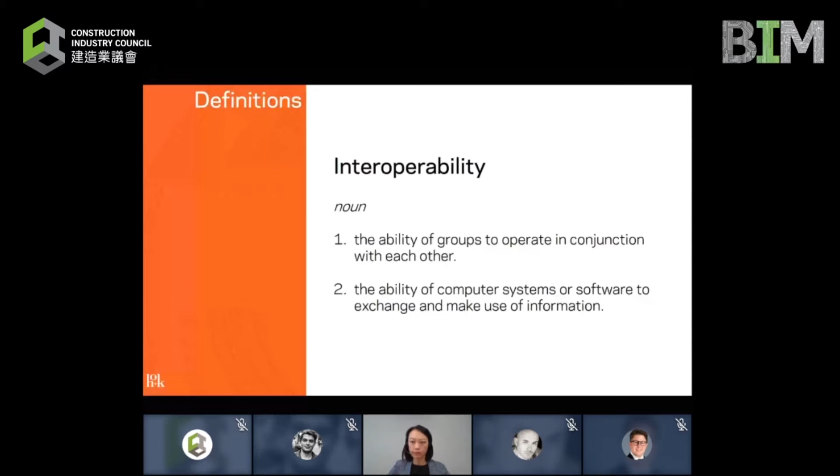If we look up the definition of interoperability, we find it has two layers of meaning. The first is the ability of groups to operate in conjunction with each other. The second is the ability of computer systems or software to exchange and make use of information. This term has three folds: people, computer systems, and software.

So how do these three connect in the BIM workflow? Let's zoom in and take a look at a typical size BIM team in one of our HOK projects. The first definition of interoperability, the ability of groups to operate in conjunction with each other, applies to the BIM team that includes owner, general contractor, architects, engineers, and subcontractors. Each role has their own responsibilities. It is the ability of these groups to use the tools which enable them to communicate and coordinate in conjunction within the BIM team and bring the projects into reality.

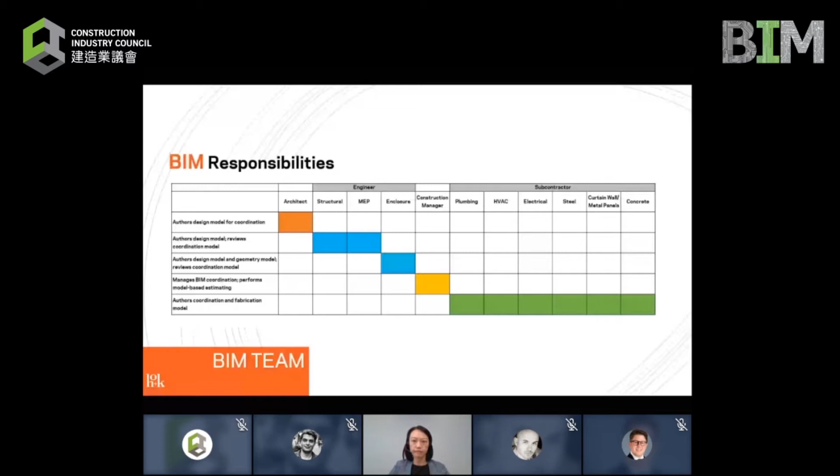Obviously, communication is required for all of the collaboration needs. The more dispersed teams are, the more important efficient communication becomes. Work sharing enables teams to understand design changes no matter where they are. Therefore, bandwidth or latency of the internet connection needs to be included in the considerations when setting up the team.

We also learned how to select hardware for 3D and BIM workstations running different software, realizing that one hardware specification does not fit all users' needs. Our information technology team had to reevaluate our BIM users' specific computing requirements based on software usage.

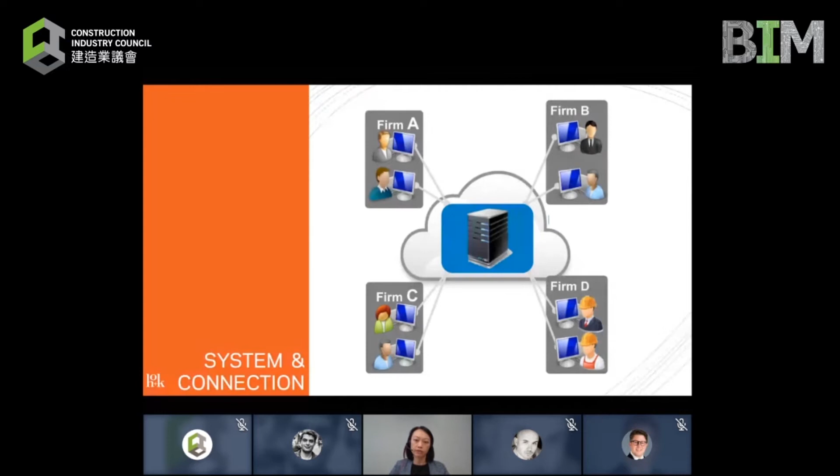With the recent rise of software as a service, SaaS, software applications will become more commonly hosted over the internet via a subscription model. Our internet dependence will only become a greater requirement in order for BIM teams to work smoothly.

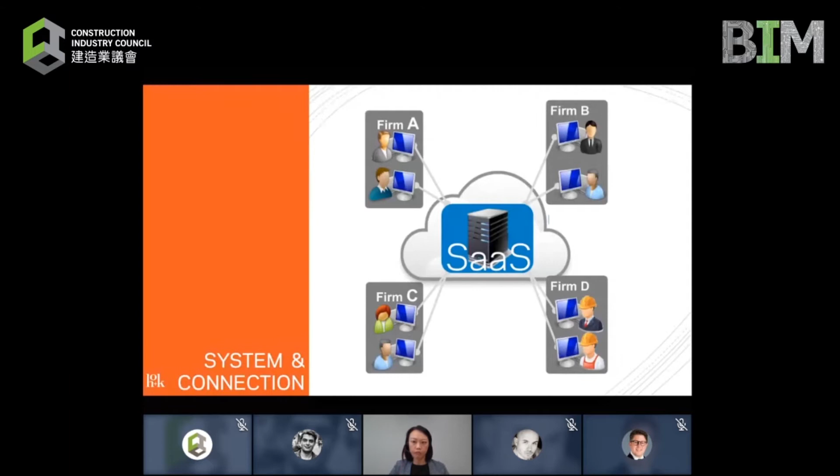When the design and construction team utilize different tools during their design process, being able to connect the primary software among different disciplines makes interoperability workflows even more essential.

If we talk about the second definition of interoperability, we need to zoom out to a big picture that consists of software, computational design plugins, applications, and cloud computing platforms that are so intertwined you will need a very large map in order to navigate through this maze of information exchange ecosystem. Learning how to connect one tool to another and make use of the information is not always easy. It requires innovation, creativity, and most importantly, a multidisciplinary mindset.

The BIM use of connecting the information exchange ecosystems involves both width and depth. The quality of everything being connected aligns with Leonardo da Vinci's philosophy of interconnectedness back in the 16th century. He saw science, engineering, and arts as complementary rather than distinct disciplines, and thought that ideas and formulations in one realm would inform the other.

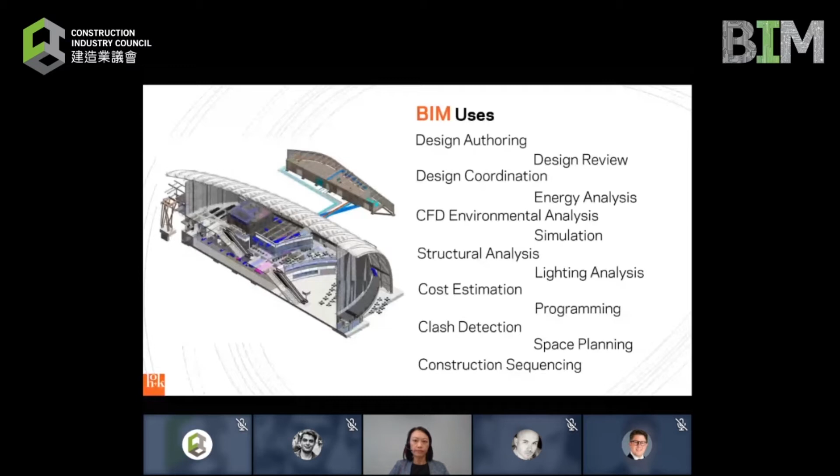The project and team I've been referring to is the Anaheim Regional Transportation Intermodal Center, also known as ARTIC. Located in the home of Disneyland, Southern California in the US, the city wanted an iconic structure for its new transit hub to celebrate mobility and fantasy, inspired by great transit halls of the past, as well as the historic hangars found throughout Southern California. ARTIC takes its form from a rotated catenary arch.

Designed by the Los Angeles office of HOK, the 6,200 square meter building opened in 2014 with an ethylene tetrafluoroethylene (ETFE) cladding around a steel shell. The exuberant design is a class by itself. ARTIC now serves passengers of the region's Amtrak and Metrolink trains, as well as local and regional bus lines. It will also accommodate future high-speed rail through California.

The complexity and scale of the design and execution required very diverse skill sets. Achieving the project goals within budget was one of the many challenges that became an achievement of a large group of designers and technical experts.

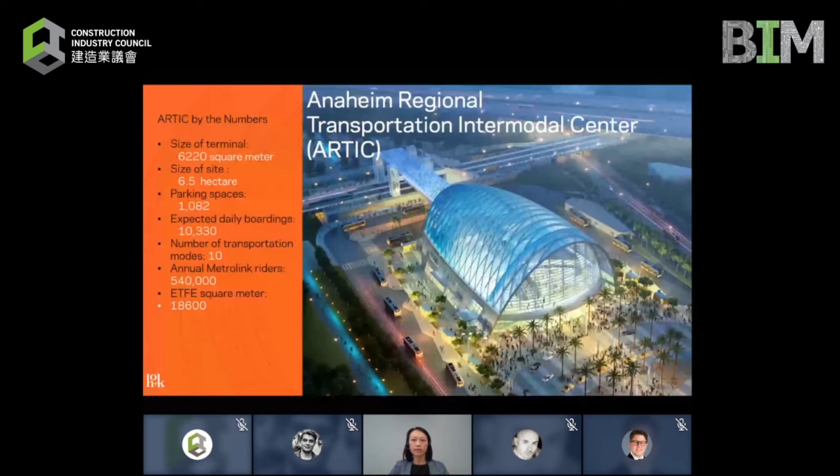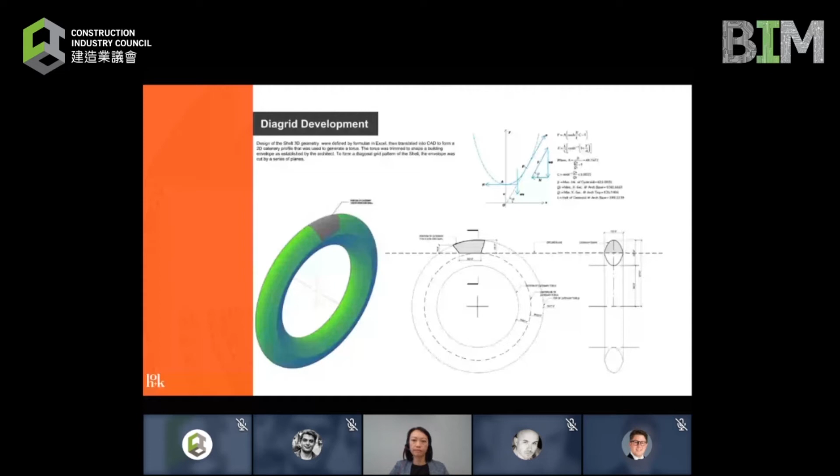For architects, the use of BIM was crucial in clearly communicating this iconic design to the clients and the public, and in assisting the project team in developing the complex form, geometry, and functions into reality. BIM also delivered coordinated documents in a compressed timeline, maintaining design intent well into construction. The greatest benefit of BIM utilization on the ARTIC project is the coordination efficiency achieved during design and construction.

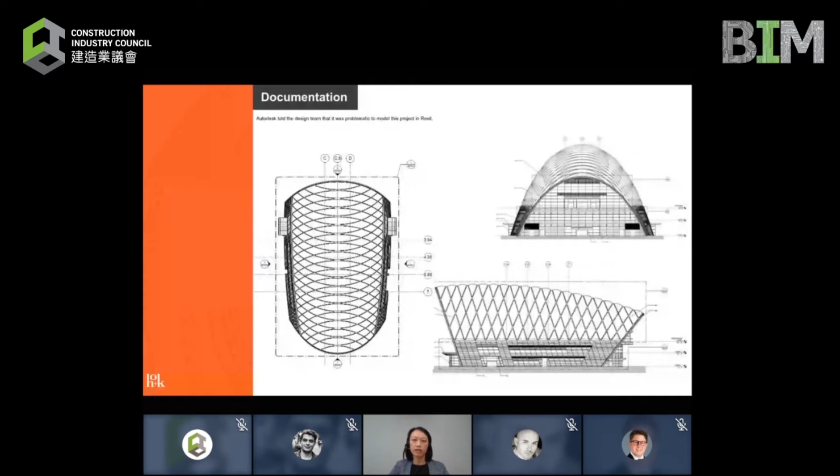The design team utilized Revit, Rhino, and CATIA as the primary software, along with Navisworks for pre-construction clash detection. The structural engineer and the enclosure consultants used proprietary tools to generate geometry in multiple formats suitable for their purpose and information exchange. Multiple analytical tools were used to study the various components and element types. Entire structure systems were modeled to ensure holistic fidelity with integrated systems.

In the general contractor's statements, the BIM model was credited as being very significant not only to them but also to subcontractors as well. The iconic design had requirements that could not be built without the BIM analysis and models. Due to the complexity of the project, utilizing geogrid dimensions, it could have been impossible to coordinate location without BIM.

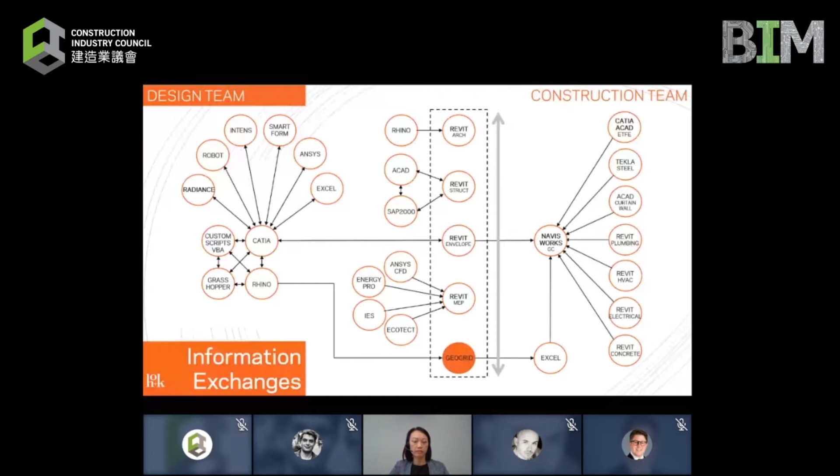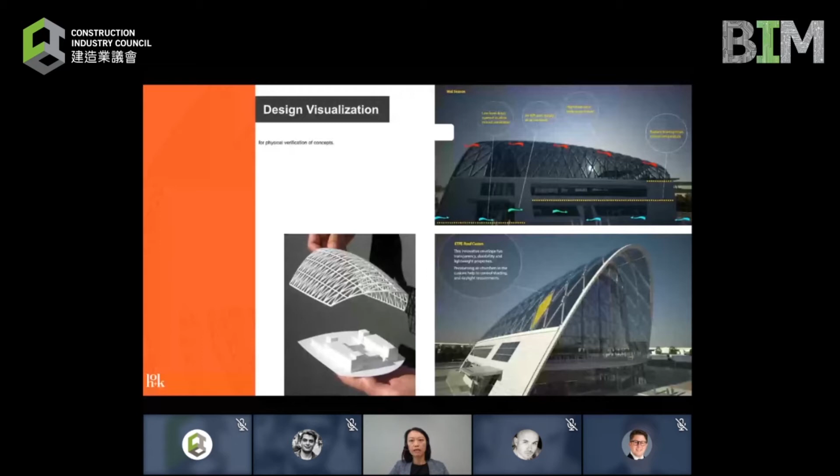By using BIM, the project team was able to produce 3D printed study models, but was also able to analyze the pedestrians and vehicular traffic to ensure safe path of travel. Analytical BIM models were employed for performance simulations of wind, ventilation, comfort, energy, temperature, daylighting, and shade. The analysis was also useful to confirm the sustainable strategies to achieve LEED Platinum certification.

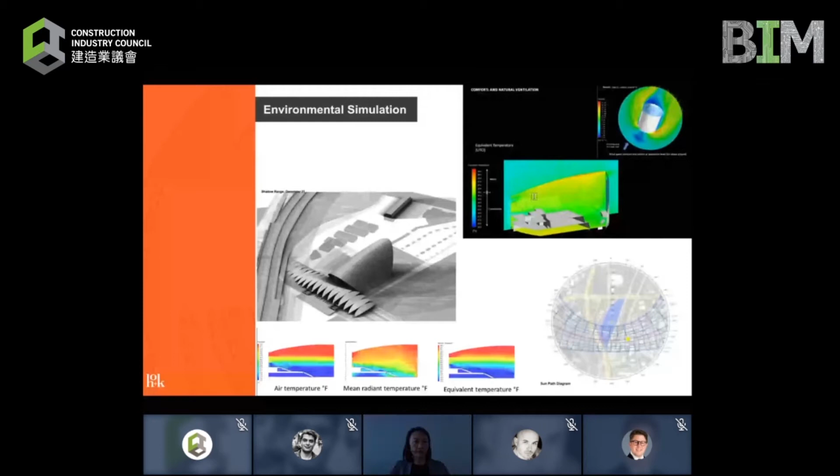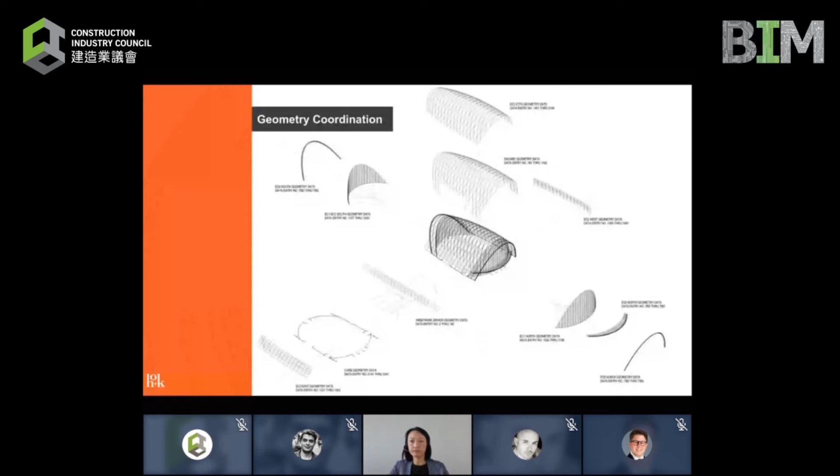For design control and interoperability, all components associated with the complex shell form were coded into what has become known as the geogrid by the build team. The 3D design was reduced to the simplest geometric elements, points and arcs, to convey the exact design dimensions to all stakeholders while remaining software agnostic. The approach was carried through to confirm as-built survey.

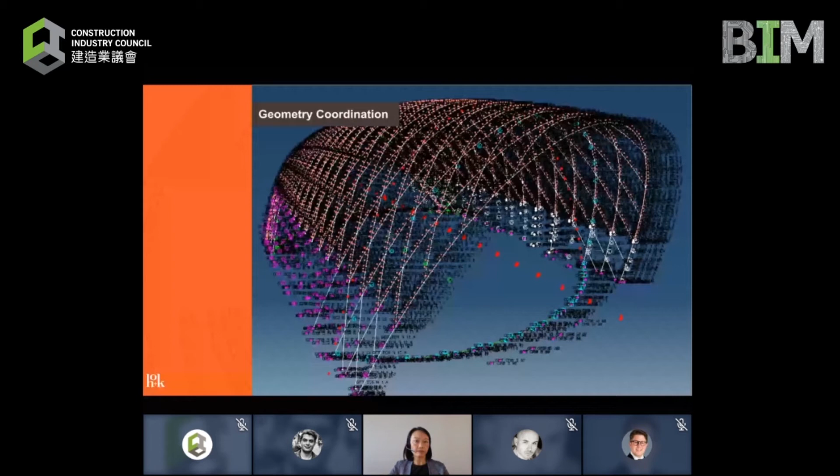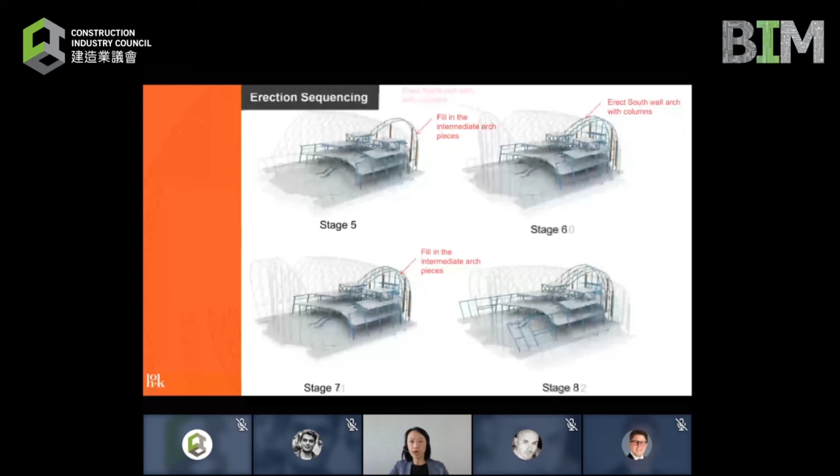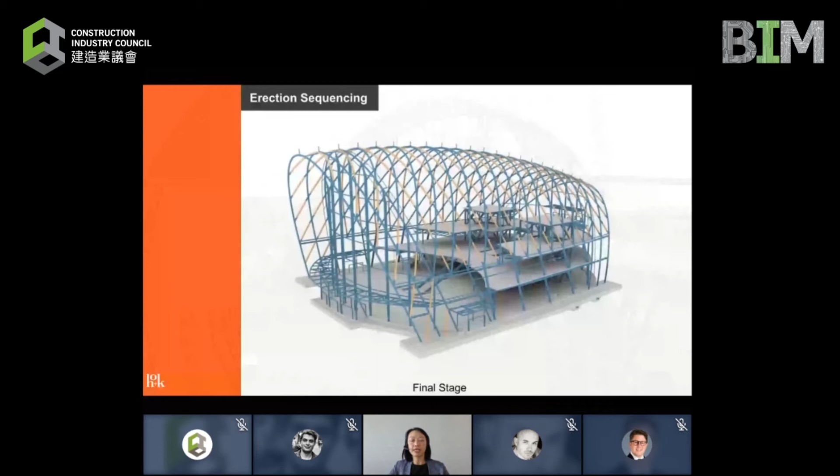The fabrication of the structural steel was designed with complex compound curves. The only means to fabricate this material is by the use of a model. Once fabricated, the only means to erect within tolerance was by using the geo points. As the general contractor stated, the as-built model is the only way to accomplish this.

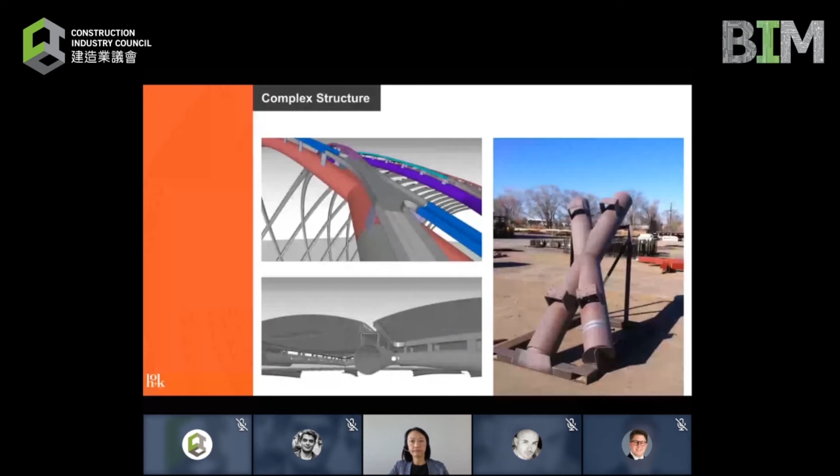Computer numeric control fabrication technology, CNC, was used for the three-way curved curtain wall at the north and south entrances. Because of the geometric data, defined points for the face of the glass, determining the armature connections and column location requires precise control of the positioning. Using BIM eases the production of complex three-dimensional shapes that are almost impossible to duplicate with manual machining.

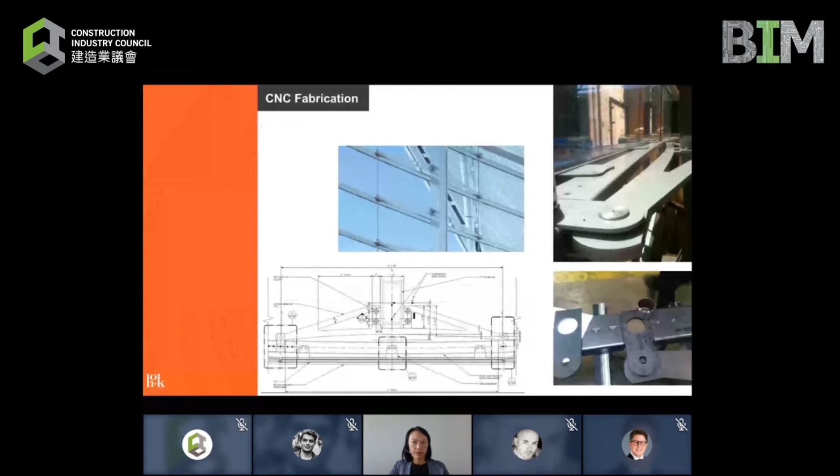The integration of the facade structure and the arch structure were formed early in the competition phase. The ETFE pillows take complex forms to match the curves of the arches, forming the envelope. Each pillow is sized differently, consisting of 3 layers of ETFE. Although it's not the first project to use an ETFE cladding system in Southern California, the sleek, comfortable quality of the Great Hall interior has become a tourist attraction.

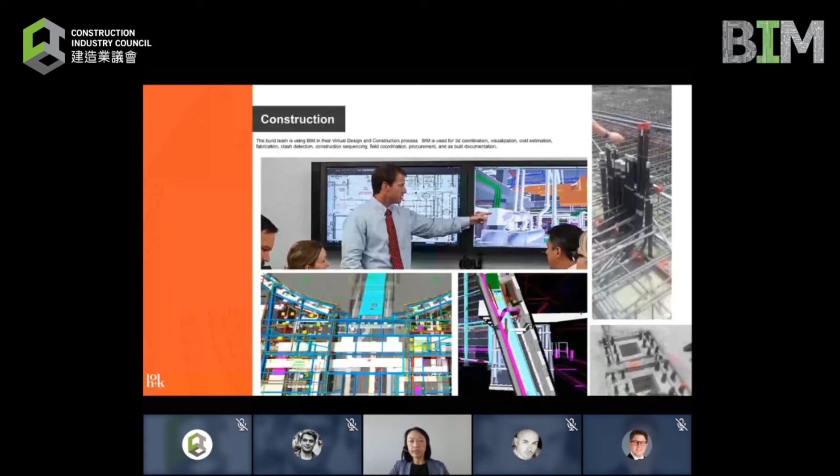The build team used BIM in their Virtual Design and Construction process. BIM is used not only for 3D coordination, fabrication, clash detection, construction sequencing, but also for as-built documentation.

Let's watch a video about the fabrication and construction process of ARTIC.

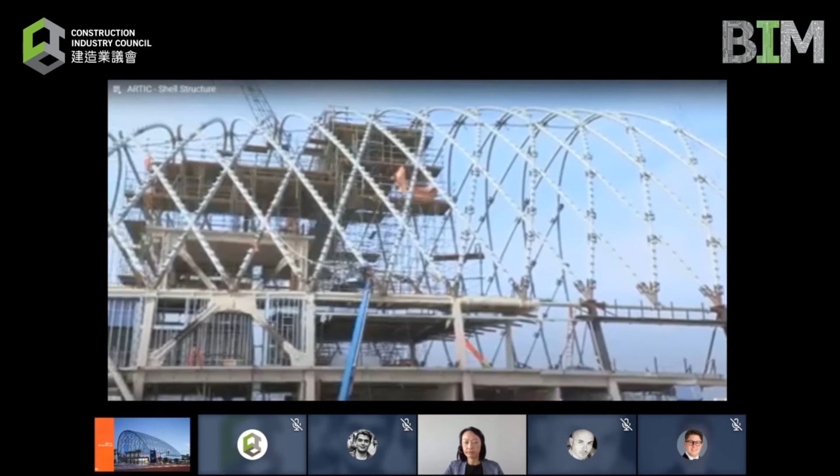ARTIC's distinctive shell is comprised of unique and sustainable materials. The diagrid steel, which creates the diamond pattern, was manufactured in Texas. Entirely new methods had to be developed in order to create the steel pieces for the shell, each of which was completely different in its dimensions.

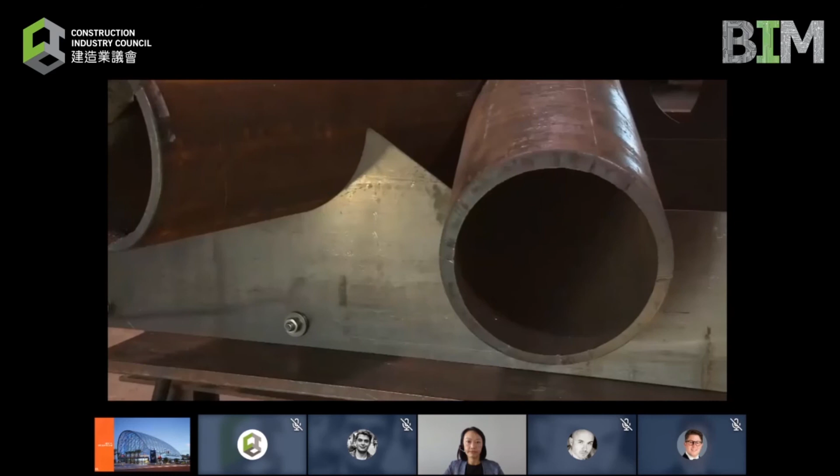This innovative shell design effectively disperses forces from winds and earthquakes, ensuring the safety and longevity of the building. A seismic joint isolates the terminal structure from the connecting bridge, allowing the two structures to move independently during a seismic event.

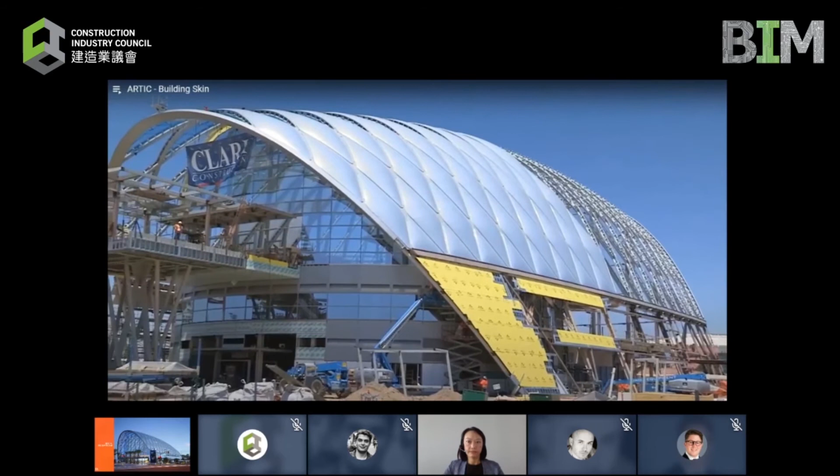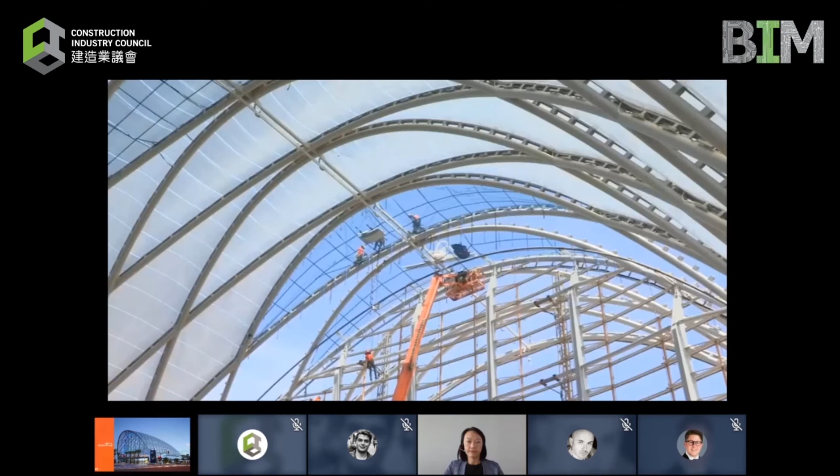Perhaps the most eye-catching part of ARTIC is the building skin, made of a material called ethylene tetrafluoroethylene, or commonly known as ETFE. Weighing just 1% as much as glass, ETFE has been used around the world for important projects like Fisht Olympic Stadium in Sochi and the Olympic Water Cube in Beijing. The ARTIC project has the largest ETFE application in the United States.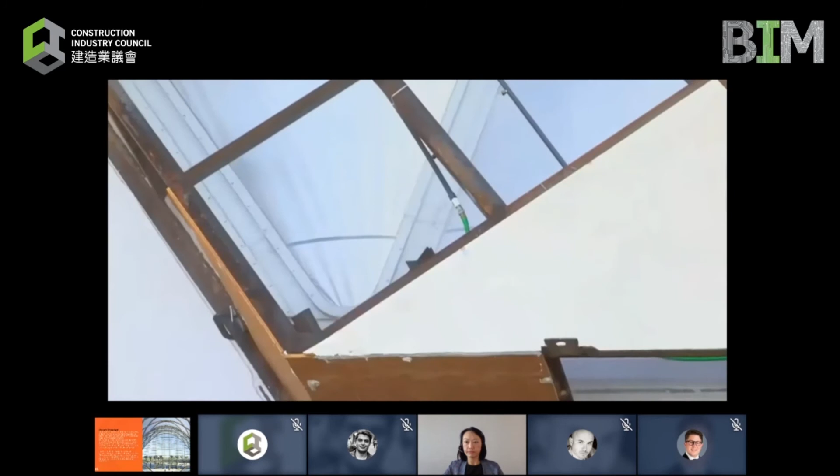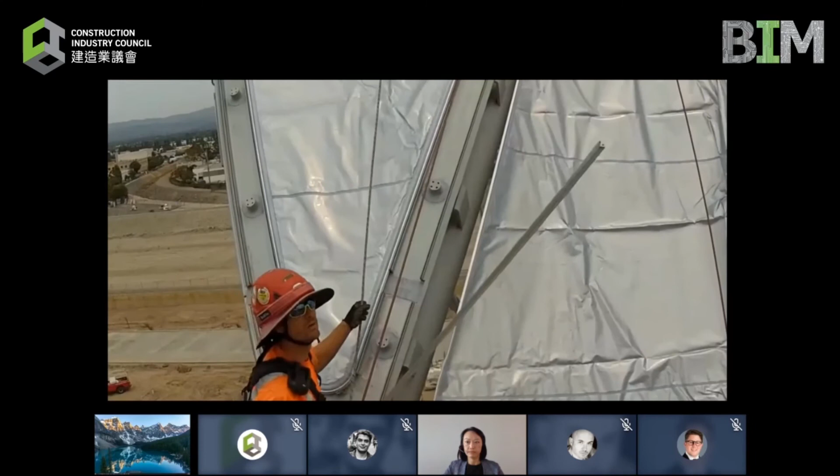The material works as a pillow system, waterproofing, shading, and insulating the building while still allowing sunlight to illuminate its interior. Rope access technicians scaled the diagrid steel framing in order to install the ETFE. After both the inner and outer layers had been applied, air pumps were used to inflate the pillows.

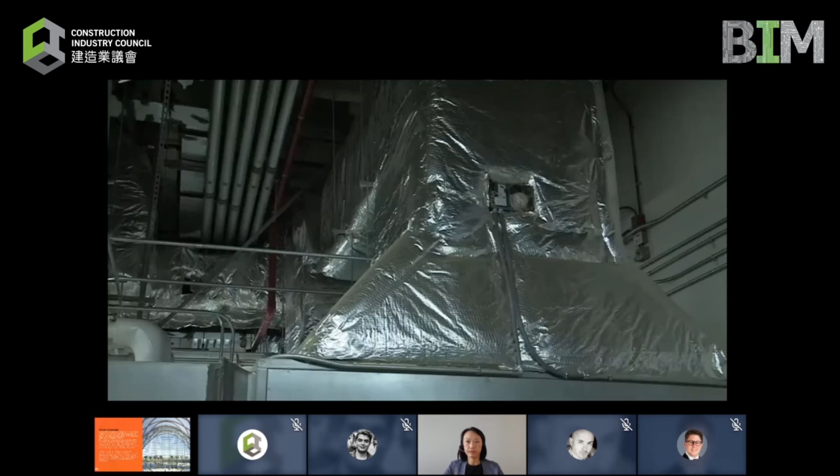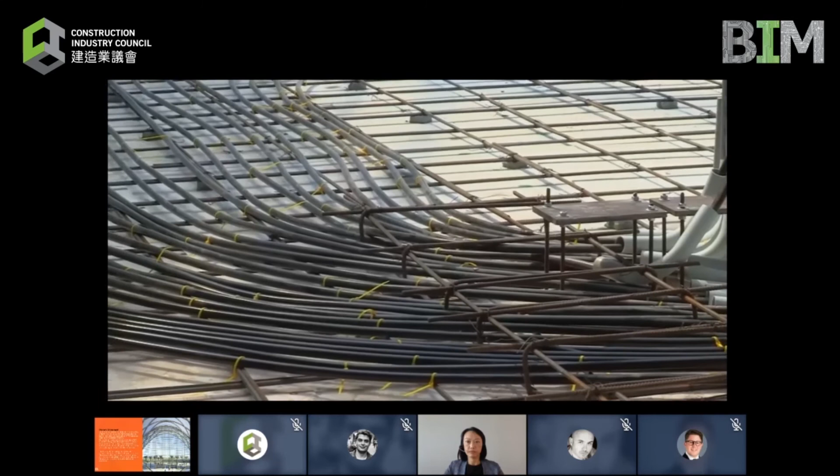The overall comfort of ARTIC's visitors is very important. There are many eco-friendly provisions in place to ensure the proper temperature and amount of ventilation are obtained. Radiant floors heat and cool the necessary areas of the building without wasting energy on the spaces that are not occupied by visitors. Pipes carry hot or cold water underneath the floors, depending on the desired effect.

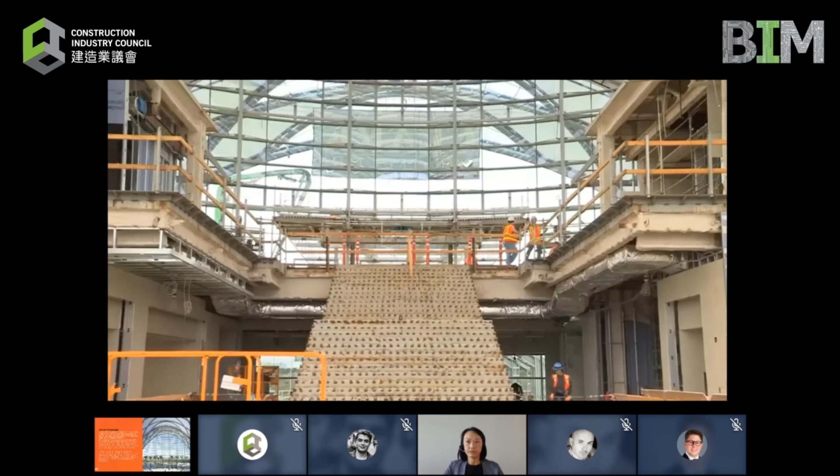In addition, a state-of-the-art louver system opens and closes the vents near ARTIC's ceiling, providing the perfect amount of ventilation. This, along with the abundance of natural light, makes visitors feel as if they are outdoors when in reality they still have a roof over their heads.

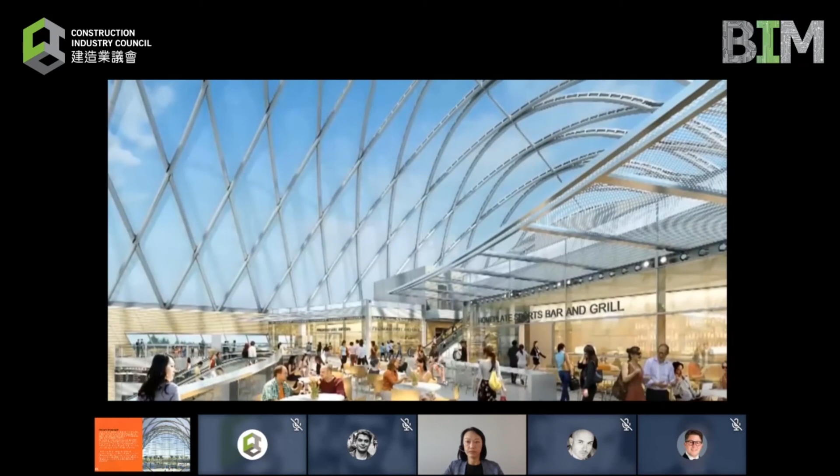Here's the owner's statement about ARTIC.

Using building information modeling for ARTIC, a first for the city, allows the city to have detailed facility information as never before. ARTIC serves as a baseline for future benchmarking. During design, the integrated approach using BIM allowed the design team to share more information and produce an iconic design for a memorable and sophisticated structure, designed to tight tolerance and employing advanced materials and systems.

The detailed design information fed the cost estimates, and bids came in well within budget tolerance. Although traditional construction documents were produced while using BIM, the experience will inform future projects in recording design criteria and standards.

In the 16th century, Da Vinci thought that ideas formulated in one realm would inform the other, and this is still true. The BIM community will be the new breed of polymath, masters of interoperability who will continue blending technology, sustainability, innovation, and comprehensive building knowledge with a multidisciplinary mindset and beyond.